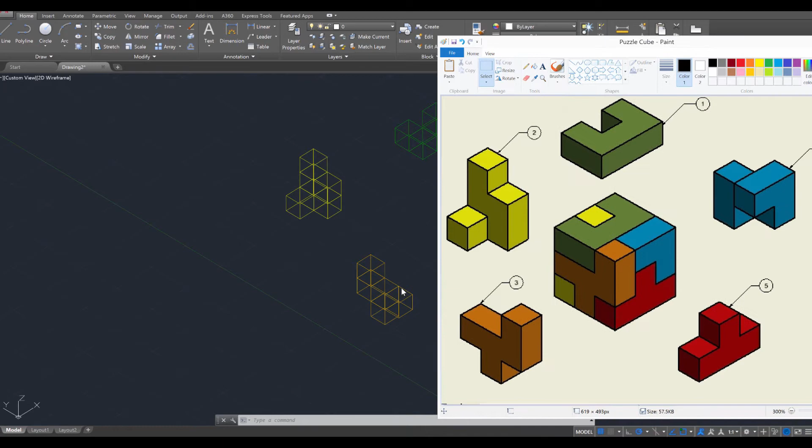So we're going to use the rotate command, or at least I am, and depending on how yours are stacked together, you might need to as well. So ROT for rotate, press enter, select the piece you want to rotate, enter, and then what I usually do is click on an edge. So let me click on this outer edge here, and it should let you rotate the piece.

So I need mine to be facing 90 degrees like that. So I'm going to use this line to help me. Click once, and now it's in place.

I'm going to do the same. Rotate, enter, select this piece, enter, click on an outer portion, and it should allow you to rotate it. So go for that 90-degree movement, and then use the move tool to just put it back in place. So everything's now aligned correctly.

Now all we need to do is put it together. So let's go ahead and do that. I was just using this piece here as a reference, but we don't need it anymore. So let's select it and delete it. Then we're just going to put a copy of each of these pieces into place. Let's see what happens.

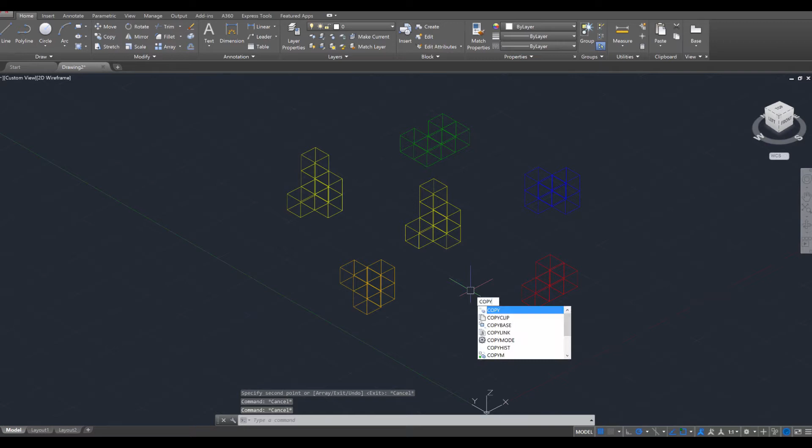I'm going to start with this piece first as my base. So copy this one right there, followed by the orange piece. I'm going to select it and then press enter, and I need this edge of the orange piece to align with this edge of the yellow. So now those two are together.

Okay, let's move on with the red now. I'm going to select this red one, press enter, and I need this edge of the red one to be connected to this edge of the orange one. So I'm going to click there to put down a copy.

Okay, let's do the green one next. Select that and press enter. And for this one, we're going to move this corner piece over to the top of that. Escape twice.

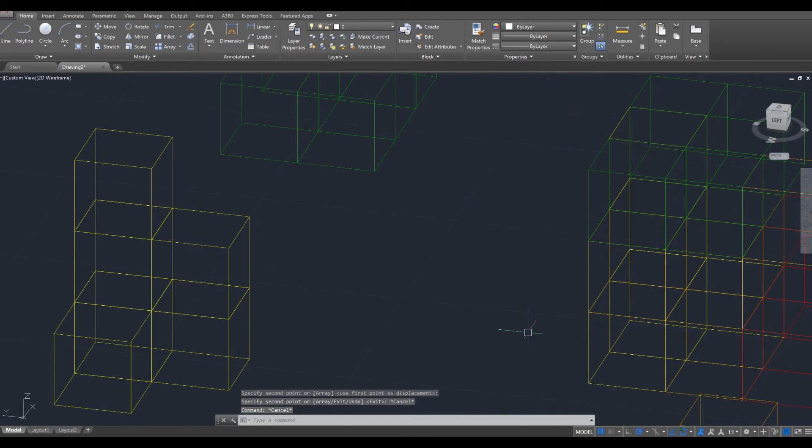And it actually looks like we're missing a block from the green one. It must have been hidden, but this isn't a perfect 5-piece. There's actually a piece, it looks like, hidden underneath this one, which would be that one over here, which would be this one. It's kind of hard to see, but I guess it extends down one.

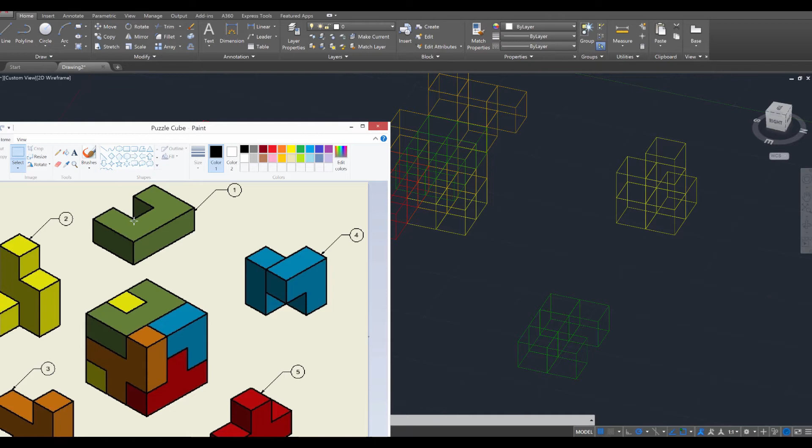So let's go ahead and add one cube. Won't be that difficult to do. Just use the copy command, but instead we're just going to select the singular cube, enter, and then I'm going to drag it to the bottom here to connect it, and match it over here as well. So it looks something like that.

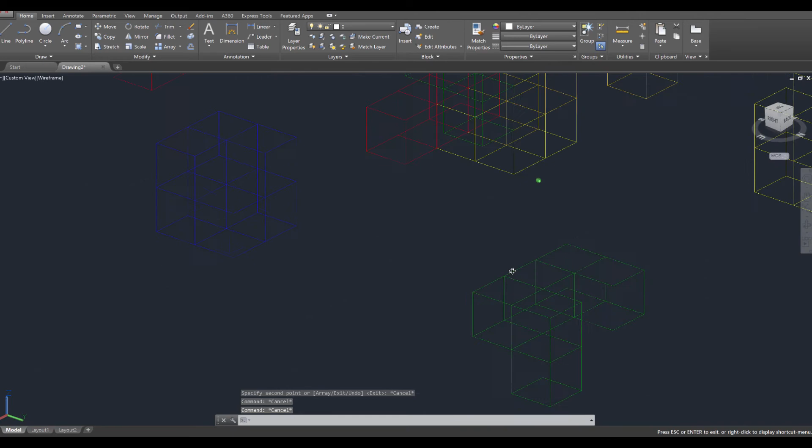And then it looks like this blue piece is going to need some modifying also. So I guess this puzzle cube model wasn't the most accurate one to go off of, but we can keep these 3 blocks over here, it looks like, and this block over here, but we will need to delete these 2 in the front there, like so.

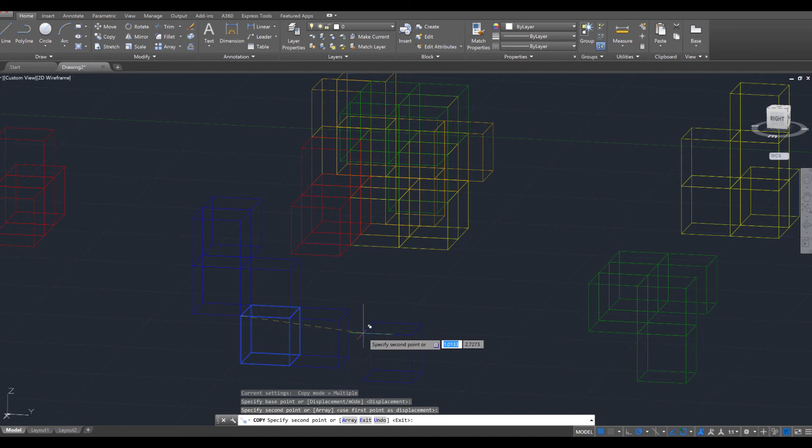And then just underneath this, we're going to have 2 additional blocks. So let's use the copy tool, select that, enter, move this one down here, and then use the copy tool one more time to select that one, enter, move this one to there. So this piece will fit into that opening right there.

And then we'll use the copy tool one more time, enter, to select the entire thing, enter. We're going to move that over to that and press escape twice. Okay, so it all looks like it's together. We got all the pieces as well to the sides there. So let's go ahead and see what this looks like.

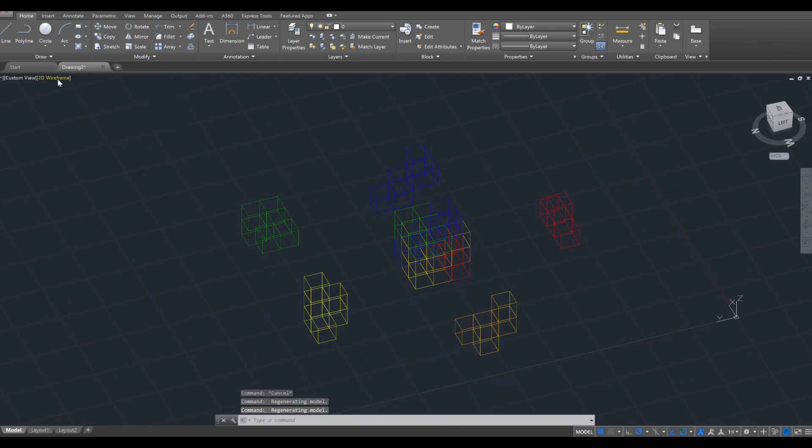So I want you to switch it from 2D wireframe mode over to shaded. There we go, and we can take a look at it. And that actually looks really nice. So it does look like a very successful puzzle cube with all the parts surrounding it, so it is an exploded view. And that's going to complete this tutorial.